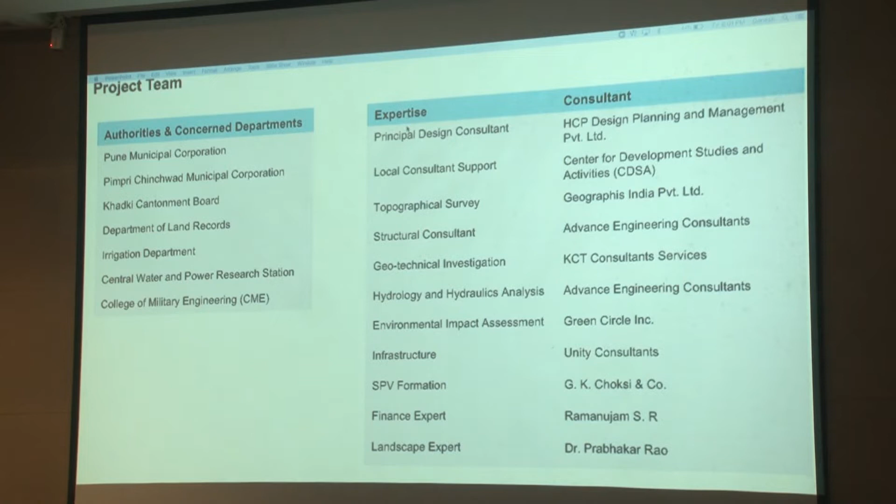So on the left side you see the list of authorities like PMC, PCMC, defense areas, and other authorities from whom we got the approvals. And on the right side you see various experts and their names. So they and their teams were also part of this entire project.

Though I am presenting it today, I am just one person, but it's the work of collective contribution. So I'll be presenting the project context in this format. I'll run through quickly because everybody is from Pune and knows about the rivers - technical studies, issues, objectives, the master plan, and everything.

But before we actually jump into the project, we need to understand the background - how the city and the river were, and why the river has turned into its current state. Our history of Pune city starts from the references we have, from the 7th century, though it must definitely be older. The point here is that when the city or settlement started growing, only then did the river start getting impacted from the urban context.

So this is the whole background till Shivaji Maharaj, till the Peshwa period. When the Shanivarwada was constructed in the 17th century, you see this very tiny area of the old town, the old settlement. We can definitely relate with this - this entire river must have been in a natural form, except for this tiny part.

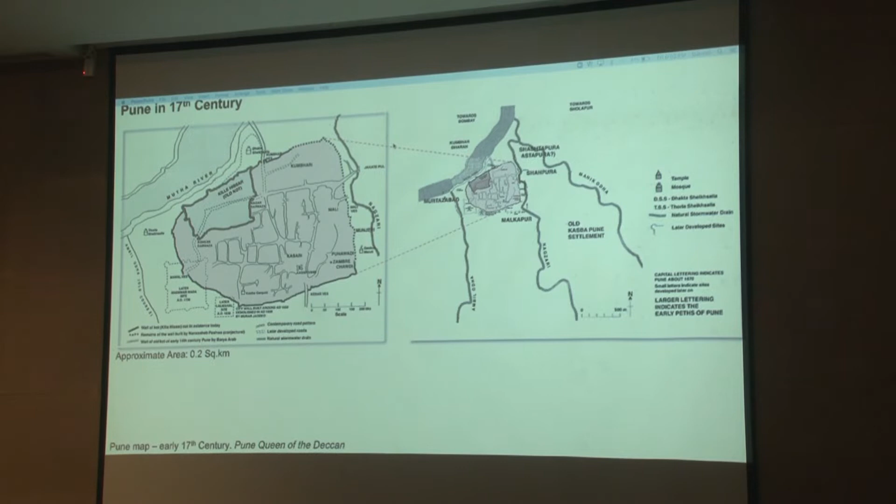But slowly, changes happened. Till the 18th or 19th century, our ancestors used to travel across the river, crossing it by swimming or by taking the help of animals. So there were no bridges, nothing like that.

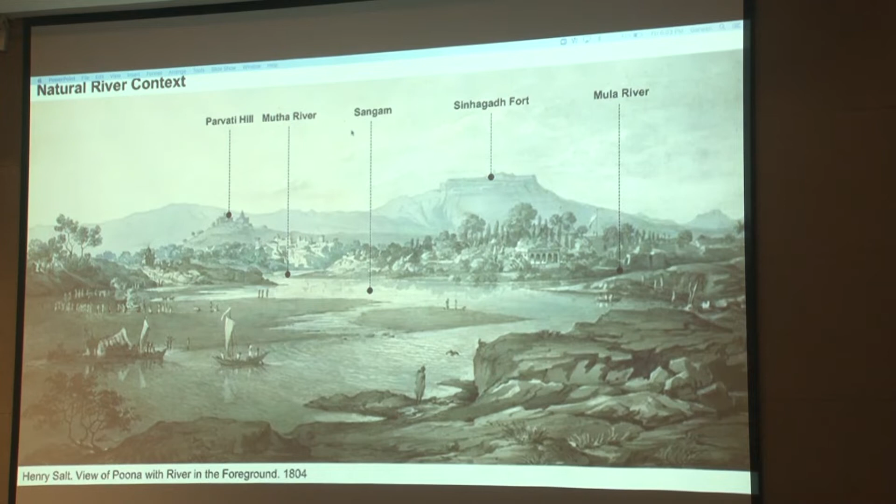This is one of the paintings from the 19th century. Here you can see Parvati in the background, Sinhagadh Fort, and very small development here. This is the Mutha River coming from the old area, this is the Mula River, this is the confluence, and then the combined Mula-Mutha River going on. This was our river at that time - very natural and not so polluted.

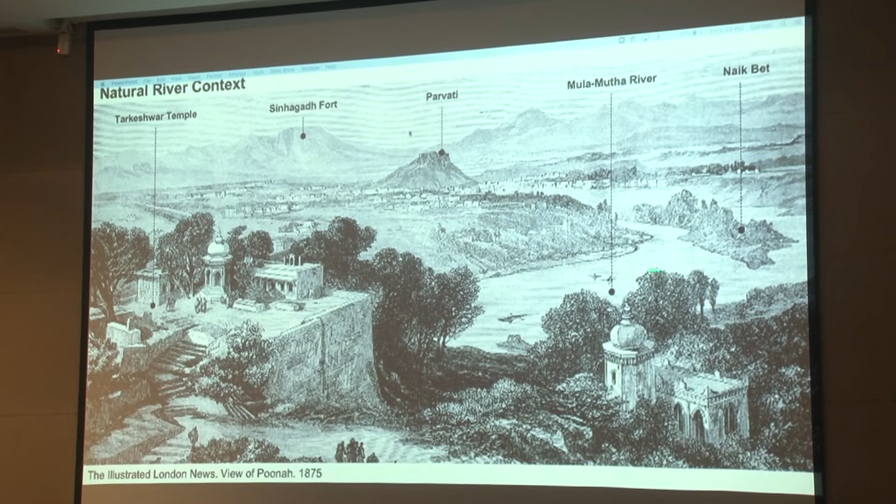Later, by the end of the 19th century, this is again a painting from this Tekri. You see Naik Bet partly here, Parvati and Sinhagadh Fort also there. So again, very natural edges, no construction, nothing - no manholes, nothing was required at that point.

Gradually, in the beginning of the 19th century, bridges started coming up. When any bridge comes on a river, it allows crossing, which means the city can grow on the other side of the river also. So till now we had pressure from one side, but now pressure started building up on the opposite bank as well, with couple of more bridges on all three rivers.

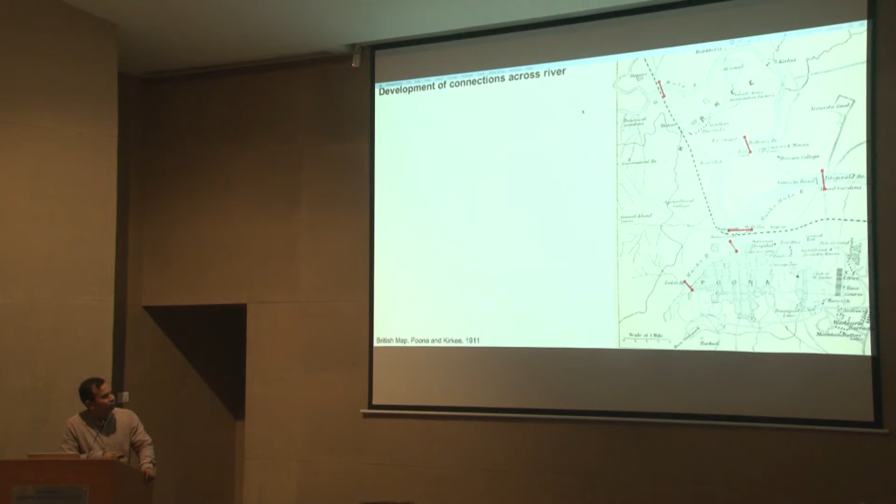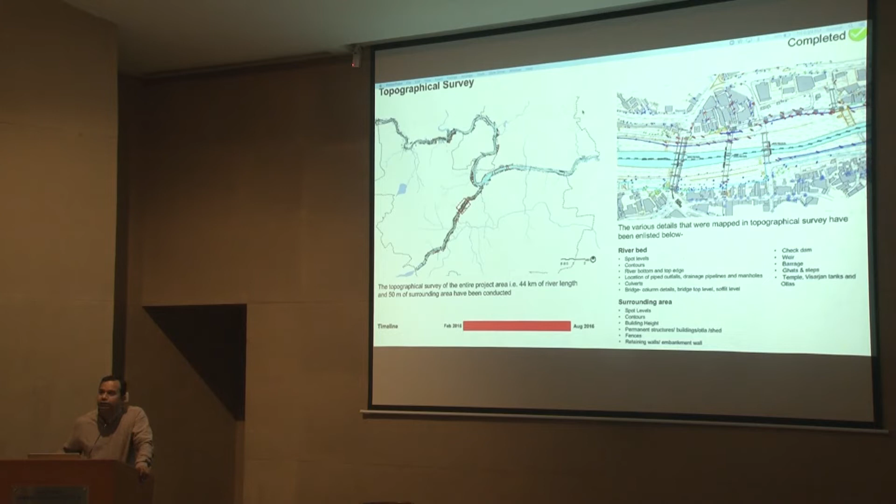We did the topographical survey of the river and the adjoining 50 to 100 meters of the area. A number of teams went on site. We also did the geotechnical investigation. Generally I explain this, but since we're short of time, I'm not entering into that.

We did the hydrology and hydraulic study for the river, and prepared a report on it, covering how much water is currently flowing, how it is flowing, and how this RFD work would impact it. That study and report is shown here.

We went to the irrigation department and asked for their approval. They asked us to get it vetted and cleared from the CWPRS. We did the discussion and got the clearance for the hydrology and hydraulics report from the CWPRS as well, and then went back to the irrigation department and got their approval. This is all a process we have been doing since 2016; we are still working on it.

Another important activity we did was understanding people's opinions—what they think about the river, the current issues, how they see and use the river, and their aspirations about this project, including which issues should be addressed first.

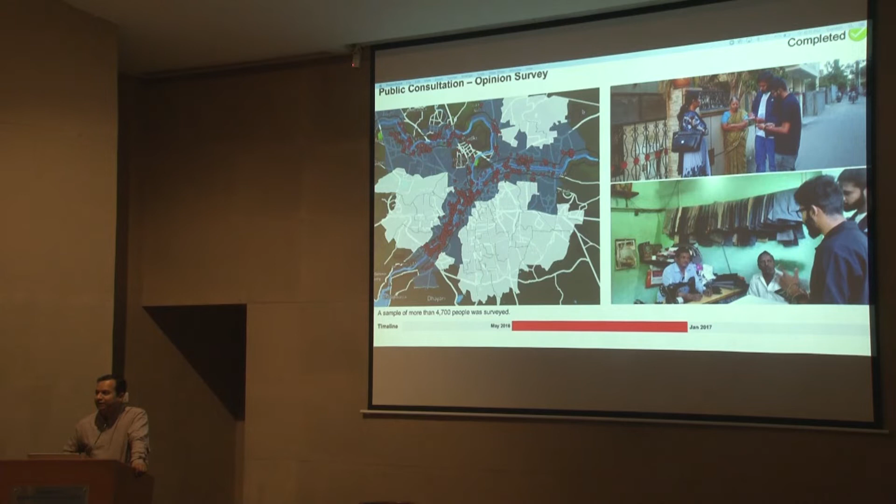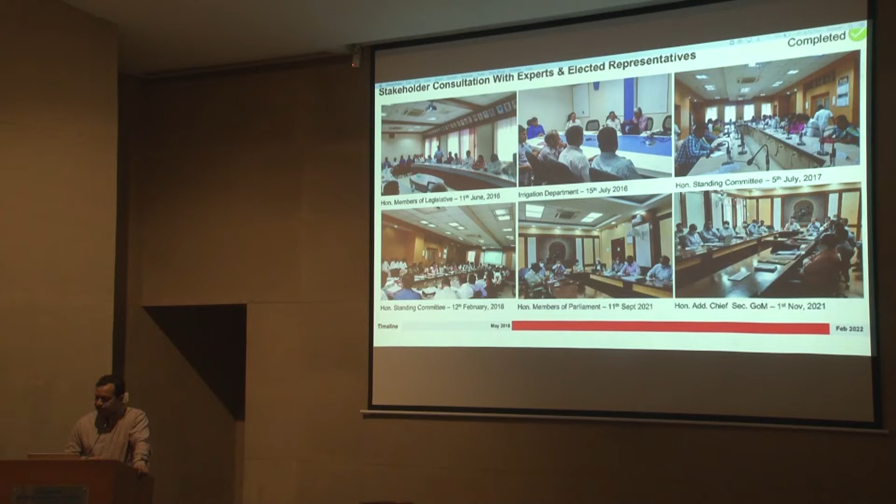We also did a number of stakeholder consultations since inception, like understanding the project, during the concept master plan, during the draft master plan, then DPR, and so on. So telescopically, the project needs to get evolved, improved step by step. So having discussions with the experts of the subject, with people's representatives, with media, with NGOs, everyone. So these are very few photographs.

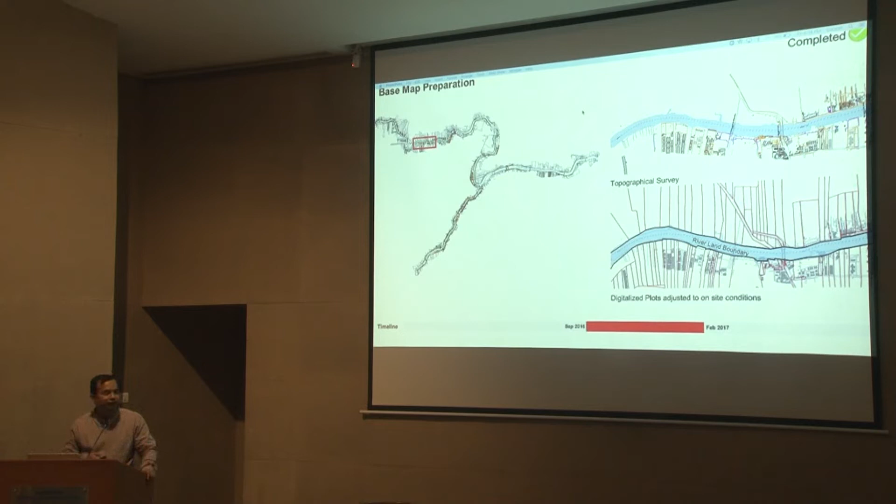So the river might be inside this or might be outside this. The river might be narrower, the river might be wider than that. Depends. But it is important to understand that in legal terms. So that was another study. The next study was the environmental impact assessment for air, soil, water quality, everything. We did the environmental impact assessment. Subsequently, we prepared the report, and we also got the clearance from the environment department.

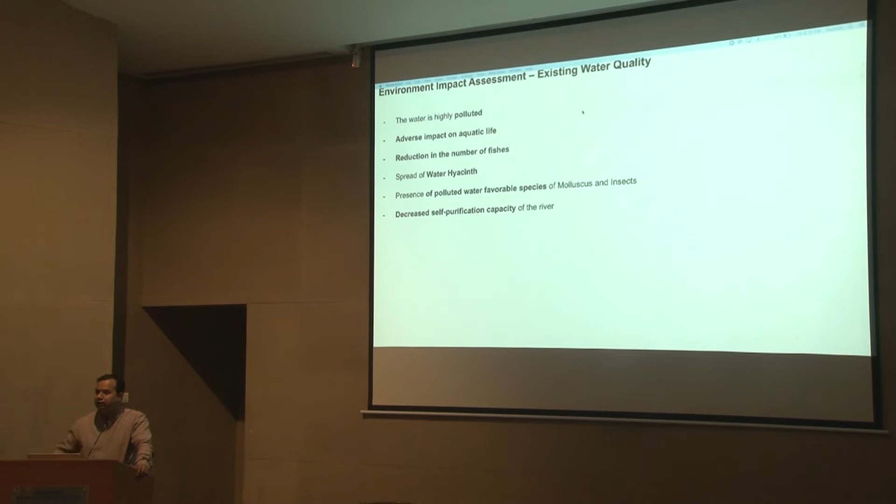So when we analyzed the water quality and the broad issues of our river water, we have very highly polluted water in the river, adversely impacting the aquatic life. It has reduced the number of fishes. The 70 species of fishes are reduced to 1 or 2. There is a lot of growth of hyacinth and so many things. So definitely we need to understand the number game also, apart from these qualitative aspects. These are some of the site photos.

Apart from these technical understandings, when any resident of the city goes on site, we see these kinds of issues: pollution in the form of sewage flowing, garbage dumping, or construction debris dumping along the river. We also have the issue of flood threat, some of the low-level bridges getting submerged, and some low-level developed, habitable areas are also impacted by the flood.

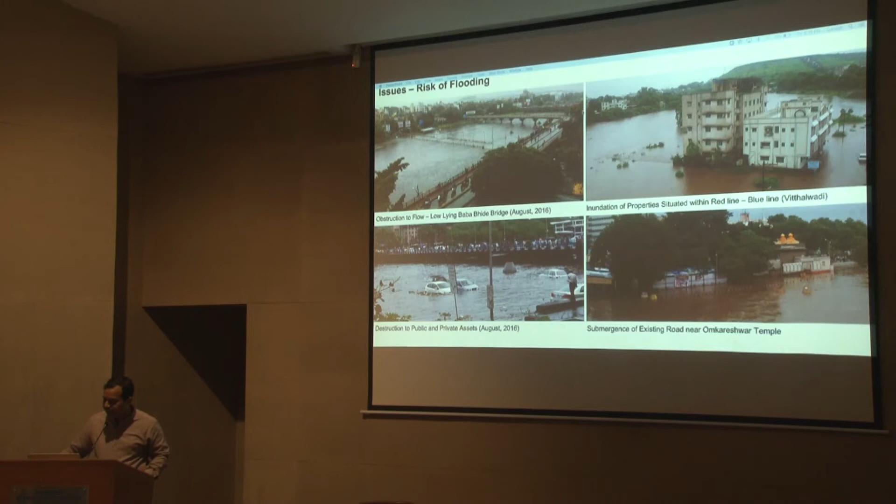Inaccessible banks: people cannot walk along the river, though it is a public asset. Most of the riverbed is dry, we don't have water there. As soon as you see it's a dry riverbed, it must be adversely impacting the ecology, right? And also aesthetically it's not good, and it's also creating a heat island effect because of the rocky bed. All these issues, you can think about the current situation. The authority has developed many activities, some places ghats, some places drainage lines, but it's not comprehensive.

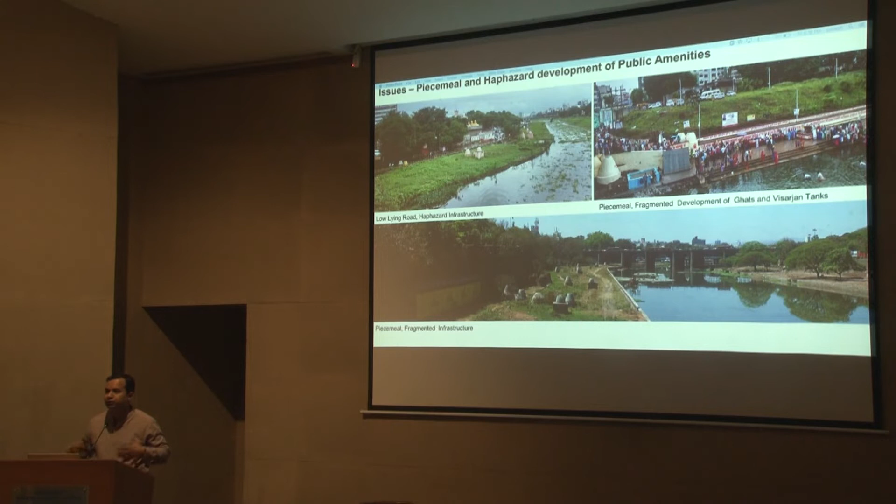It's in a piecemeal manner, so it's not creating very meaningful space along the river. All that is resulting in the city turning its back to the river. We don't want to see the river. If you have a plot along the river, then also you build some sort of compound wall or something so that you don't see the river. You should be protected from the flood. Everything, technical, aesthetical, all the issues are there.

So instead of bringing some alien kind of objectives which are very new to the world, I think having the same issues resolved under the project makes more sense. So these are the issues. Our rivers are polluted, so we need to clean the river and make it pollution free. There is a flood risk, so we need to reduce the flood risk. So we'll go one by one through how these objectives are strategized in the project. Let's see the first one.

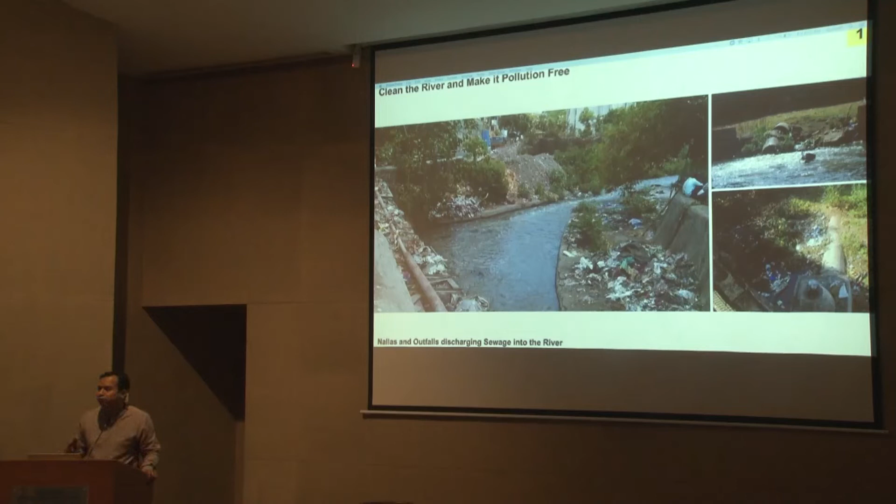We need to understand from where this pollution is coming into the river. So these are the two sources. One is the open nala or the piped outfall. They are bringing pollution into the river, simply. So we mapped all those piped outfalls and open nalas along the river for all three rivers. In order to prevent that entry of pollution into the river, there are some existing interceptor lines, trunk lines. There we can integrate, curb these outfalls and take the sewage into the STPs.

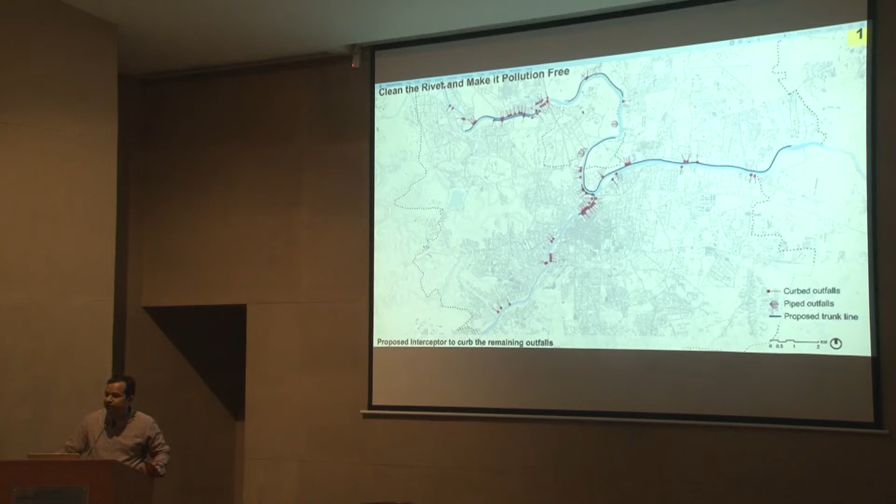Along with that, the JICA proposal is also underway. PMC is working on this. A lot of tendering work is also done. So we also checked that alignment along the river. That will also help us to curb these polluting piped outfalls and nalas. And if any outfall or nala is still missing, then under this project we try to propose some more interceptor lines. So the point is, from nowhere should pollution enter the river. Whatever sewage pollution is entering the river should first be taken to the STPs, treated, and then poured back into the river. Simple.

Additionally, because some of the upstream areas on the Mutha River are getting developed, rather already developed, we need to have some sort of treatment facility, the same interceptor line and treatment, and then treated water should be poured from the upstream area. Otherwise, we'll clean our area and from upstream the pollution might come. So that also we thought out.

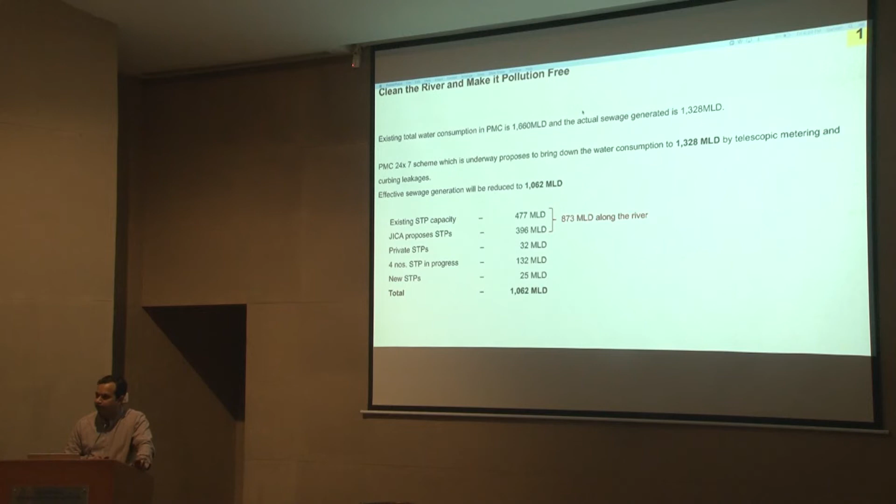Apart from that, there are some private STPs. Some STPs are under progress, and 25 is a shortfall which they will cover with some new STP. So broadly, they are talking about completing all the sewage treatment capacity of the city along the river in the current PMC area, so that from no point should pollution enter the river, and it should be treated and only then released into the river.

We also have these kind of huge manholes. Everybody has seen that, and they look wonderful, right? So we need to sort of do something about it. So what is happening? It's not only about the aesthetical issue. It's also about the damage during the flood. It resists the flood flow, afflux gets into it, height is increasing, the speed, velocity is reducing, plus it gets damaged. So multiple issues are there.

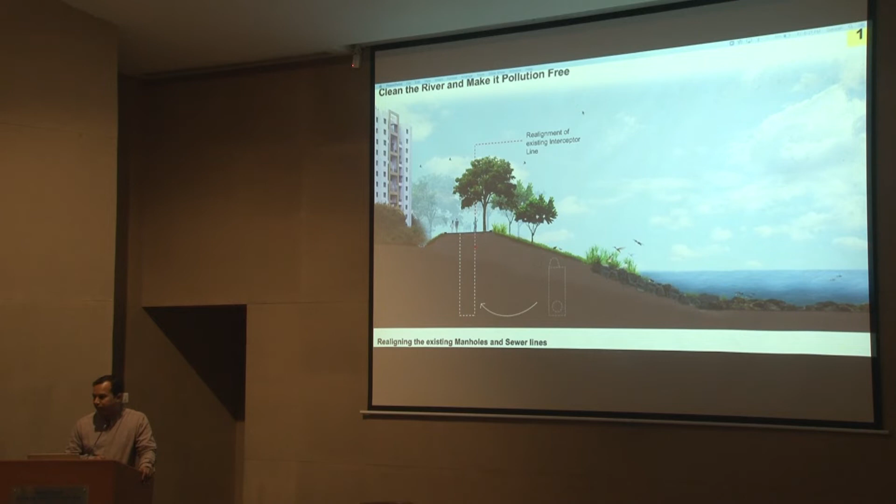So we need to improve this situation. So what we are trying to do, with this kind of large manholes and the drainage line under that, when we do this kind of green embankment, we need to shift it, take it away from the riverbed to the periphery and integrate with the embankment so that there will be no damage, there will be no adverse impact to the flood, and we can maintain it in a better way. So that was all about the sewage generation and sewage treatment before we release into the river.

But apart from that, there are other sources like garbage dumping and debris dumping along the river. So why that is happening, that we need to understand first. Because there is no check on the river. It's 88 kilometers of long river length. Who will keep a check of the river? How many watchmen or security guards PMC need to put? It's very difficult. That means we need to have a public check on it.

Let's have one example. This is Tadiwala slum area along the Mula-Mutha River, and you see the situation. It's unchecked area. What if we convert this area into a very walkable trail over here and a green embankment along that, which is protecting from the flood also, and this edge will allow people to walk or do the cycling. If people check is there, then nobody will dare to put a garbage bottle, a single bottle into the river, and definitely a truck of debris dumping will not be able to get an access. So that's the only way out, right?

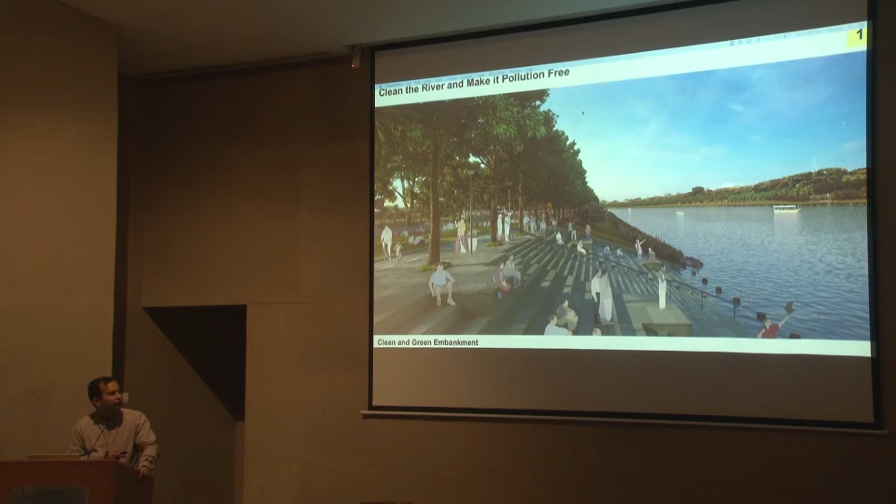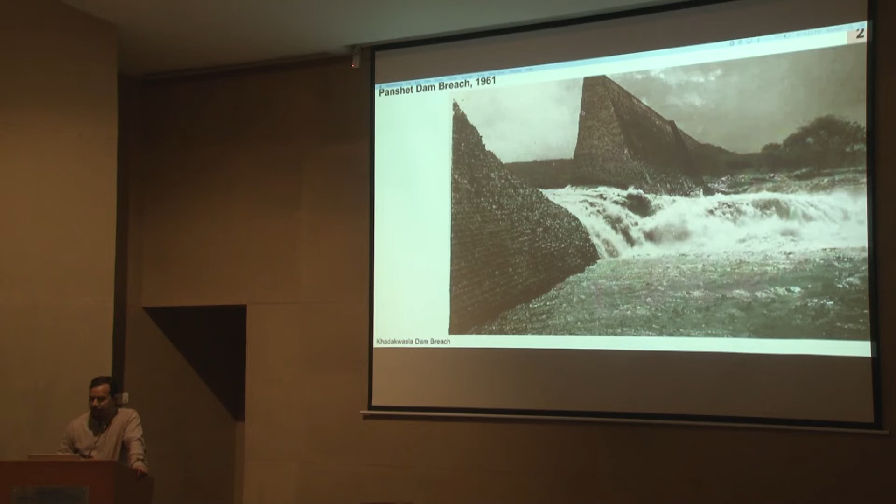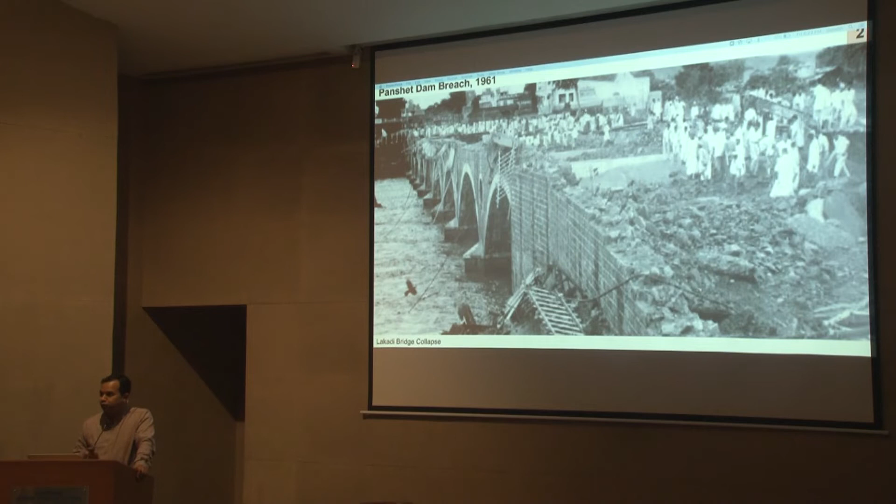Let's go back to the history again. This is Khadakwasla Dam, and this is Panshet Dam. This Panshet Dam was damaged in 1961, everybody knows. And what was the impact? This is from the Pune Queen of Deccan, and a lot of area surrounding the river got inundated. The flood affected this area. This is a Lakadi Pul photograph. Lakadi Pul, which we see is a new bridge. Earlier this kind of bridge was there, so that also got damaged. This is the area which got submerged because of this dam break.

Later on in 1962 to 66, this Khadakwasla Dam was reconstructed with the new technology. In 1972, the Panshet Dam was again reconstructed. Why am I telling this story? Because now the technology has changed, how the dams are constructed. Now we don't have a risk of dam break, but still we have a risk of flooding. So the risk of dam break is technically something very low, but risk of flooding is high, which we will go into in detail. So now we need to think about the risk of flooding only in an urban context, no need to think about the dam.

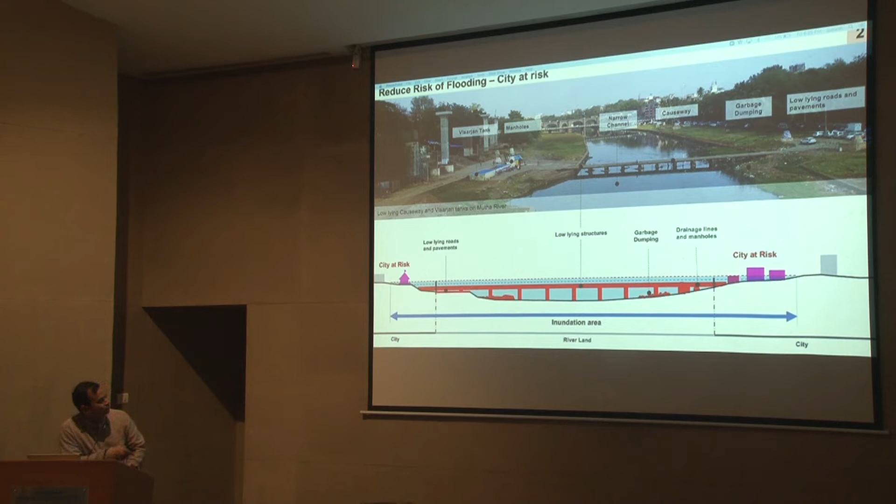So if you see this kind of situation, you can point out the number of obstructions that are there, and that is actually becoming a hurdle to the flow of the water. As soon as we identify and remove these obstructions, there will be some improvement in the carrying capacity of the river. So flood improvement means improving the carrying capacity of the river.

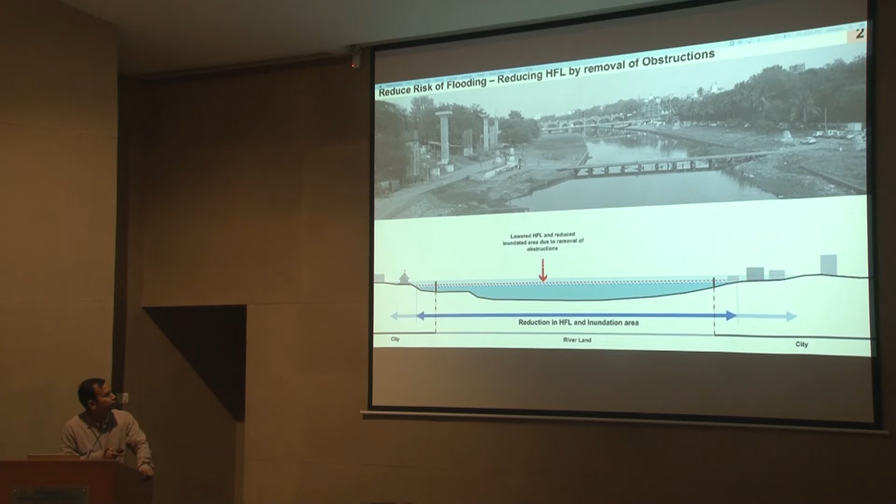Having this middle area very much clean and free from obstruction is the most important objective. But by doing that, we may not be able to reduce the inundation so significantly. Some of these areas may get inundated, some have developed, some may get developed in future also. So to prevent the entry of water into these low-lying areas, we need to have some kind of edge protection work so that the water only flows through the river and does not enter into the city.

But instead of having just a vertical wall, if we have this kind of green edge work, we can also accommodate infrastructure like that interceptor line, etc. We can also have walkways from the pedestrian movement point of view, and greenery along the river.

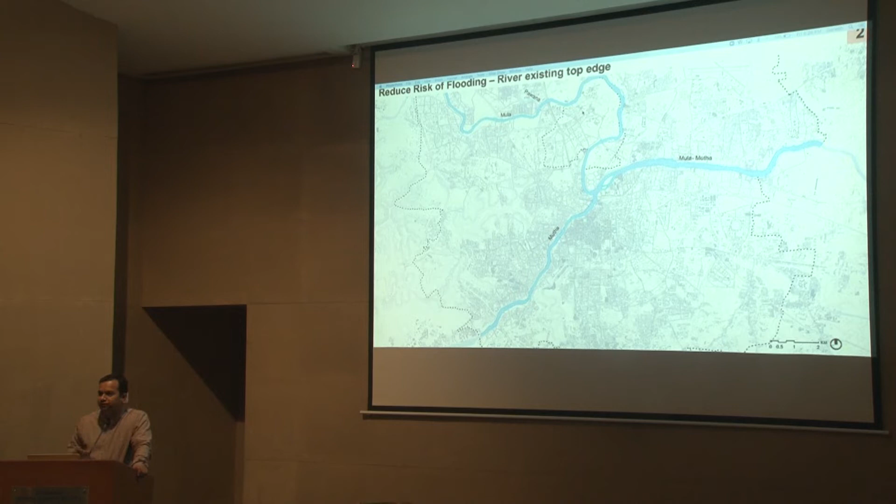This is a current river in natural condition, not from the land record point of view, but from on-site. This is where we see the water. If you zoom in a little bit and try to understand, there are some areas which are very narrow in current condition and some areas very wide. Let's zoom into one of these. This is how it looks on Google. On site, this is how our river is.

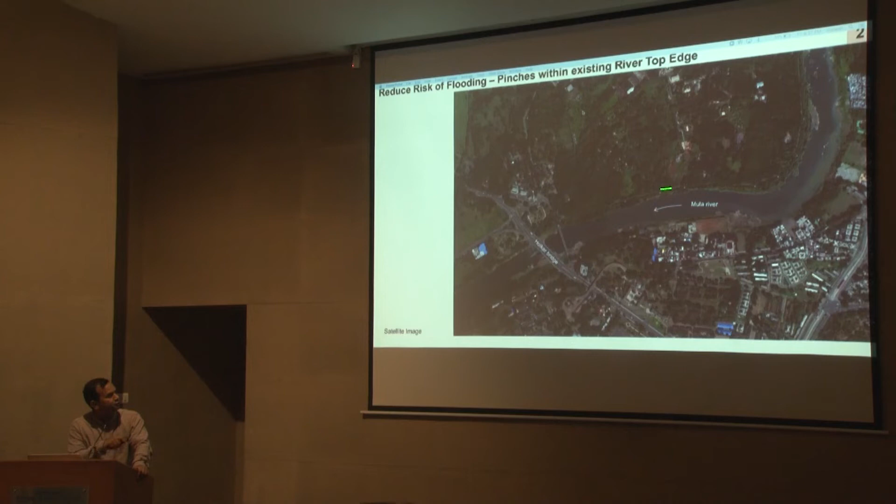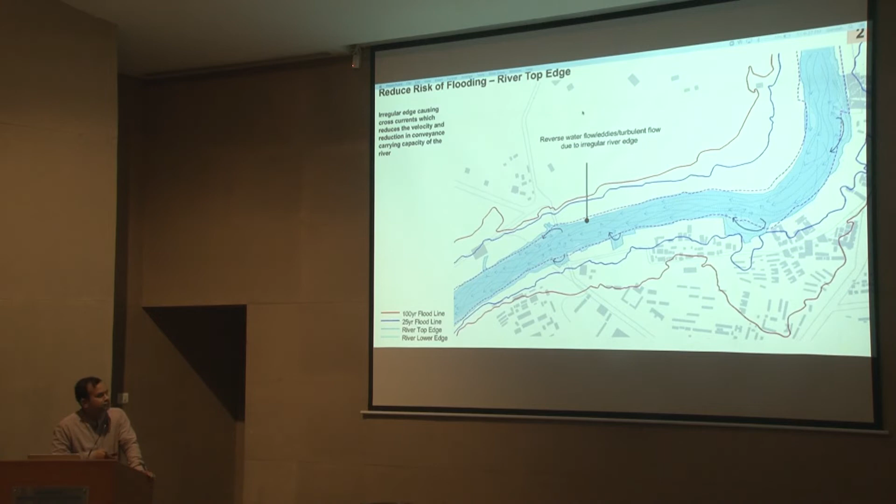When the water flows in a lean period, it flows like that because the terrain is always up and down and back and forth, so there is some movement into it. But as soon as the water level keeps rising during the monsoon season, these kinds of eddies or bhavre, as we call them, start happening, and that actually goes on increasing as the water spreads into the surrounding areas. So these surrounding areas are not adding to the carrying capacity of the river, but rather they reduce the flow, the velocity of the river.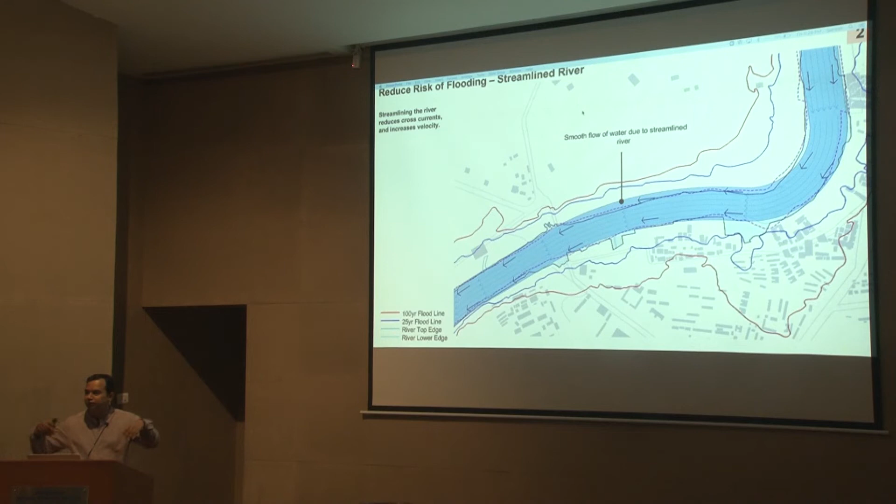So the idea is to not allow water to enter into these very shallow and surrounding developed areas, but to use the water in this middle, actual river part of it. Hypothetically, we want to keep the river water into this lower bed only, but we need to have some kind of edge protection work, otherwise the water will not listen to us and it will flow into the lower lying areas. That's why, in order to keep that water into this river only, we need to have some kind of green edge protection work.

By doing that, what we achieve is the eddies are gone and the velocity of the river increases. As soon as the velocity increases, the carrying capacity of the river also increases, and that gives us a better scenario for the flood level also.

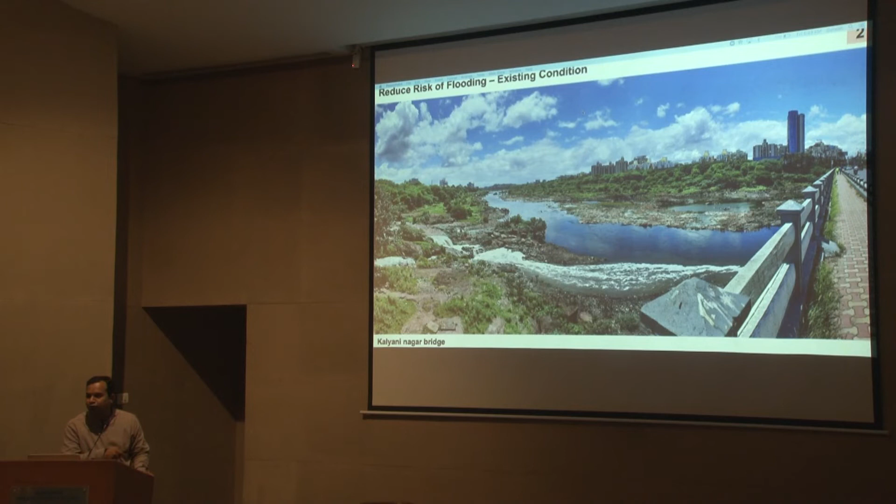This is one of the photographs from the Kalyani Nagar bridge. You see here, Kalyani Nagar bridge. This is the current scenario, lean period, there is not much water available. During monsoon, if a 100-year flood comes, this is the scenario - it may enter into these kinds of vacant areas. Since there is no development there, it may not damage much in terms of life and wealth.

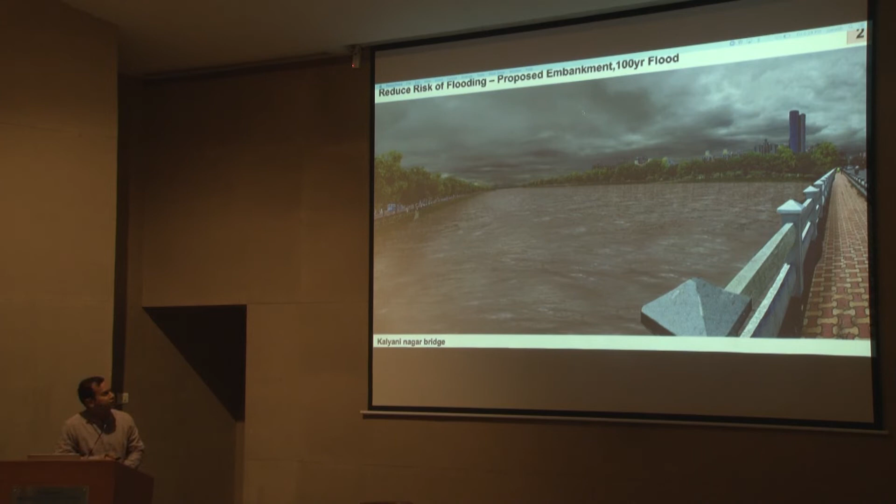But if we have these kinds of edge protection works, green edges, the water will remain in the river bed only and will pass very efficiently. Once the water recedes on a normal day, we'll be able to see again these kinds of green embankments, and that's how we can protect the surrounding area from the flood threat.

Let's see the same scenario for a developed area. Here you have this Tadiwala slum, which is a very low-lying area. Under a 100-year flood, it will definitely get submerged and the water will enter into the houses of the people.

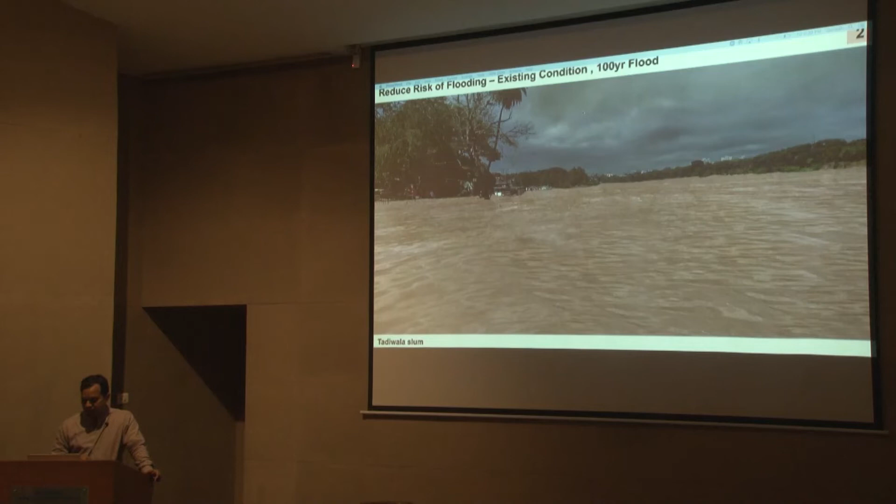But what if we create this kind of edge protection work and allow water to flow through the river only? So these low-lying areas will be protected, and once the water is gone, it will be ready to use again. That's how we need to design the landscape wherever hardscape areas are needed, such that there should be no damage due to flood, but it should also come back immediately just by cleaning or something.

It should be ready in a day or so for people to use. But here we are talking about a river which is 44 kilometers, so we cannot have one solution everywhere. We need to become a little design oriented and try to find references from the site only.

In the first scenario, we termed it as separately sparsely developed, moderately developed, or intensely developed areas where development has reached up to the river. There is less land available there. Here you can see a lot of land available, and the quantity of land availability is reducing. This is Mutha River where the very narrow channel is there, 30-35 meters, and the building is very near to the river.

So if we have more land, we can go a little more gentle with the help of natural material like compacted soil, stones, grasses, trees, shrubs, etc. If the land is not that much available, then we can go a little more trapezoidal, but the kind of technology and material is the same here. That's why we are calling this a green embankment.

And these green type embankments are significant in number. They are 87% of this 88 kilometer stretch. But in some areas like this, where buildings are there, you cannot go ahead and demolish this building and then build a green embankment.

So you need to be a little reasonable. The project should be feasible to implement. And that's why, forcefully, in some areas we need to go a little vertical. But there also we need to house this interceptor line inside, with shade giving trees on lower and upper levels. So as much as possible we can do that. Wherever acquisition of land is not possible, there only we are going for that, which is only 13%.

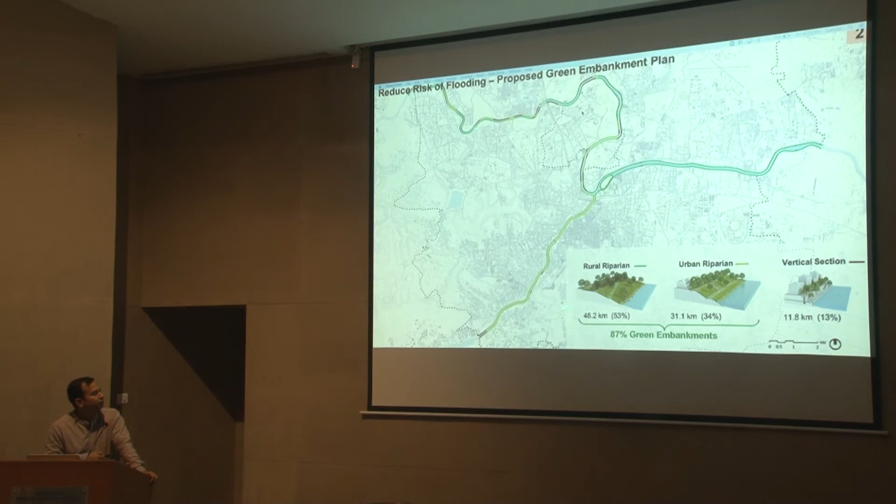This map itself shows you there are few areas where the red dots are there. That is 13%, and mostly the edges will be green. It's like defense areas etc. where we need to go vertical. We cannot ask for more land in the developed areas. So most of the river embankment will be green in nature.

So we are protecting the city from the flood, as well as protecting the river from erosion, and we are trying to create green edges. The next objective is to provide accessibility. This is the current situation - the river is like this. We cannot access it, we cannot see it there. But everywhere we cannot just go and do a one single stroke and make everything accessible.

So we tried to categorize it into 3 or 4 categories. One is very active areas where the current ghats and activities are there. So we mapped all those activity places and termed it active areas. There will be some areas which are calmer areas, like here you can only walk, do cycling, sit and enjoy the shade of trees and green edges.

But some areas are very, very important, very natural in condition. They will have very thick green vegetation along that. So those areas need to be very much protected. As much as possible, we should reduce access also, only service access or something like that. So there are some areas like Naik Bet here, Salim Ali Bird Sanctuary here.

Even along defense areas, some places might have more density of trees. Here the biodiversity, the botanical garden is there. And here the Ram Nadi confluence is there - there also you can see a lot of green vegetation. So wherever possible, we can make that kind of customization so that it looks like a very natural river. After a few years, it should look like this is how the river must have been since the beginning, as if nothing has happened in between in the last 2 centuries, I think.

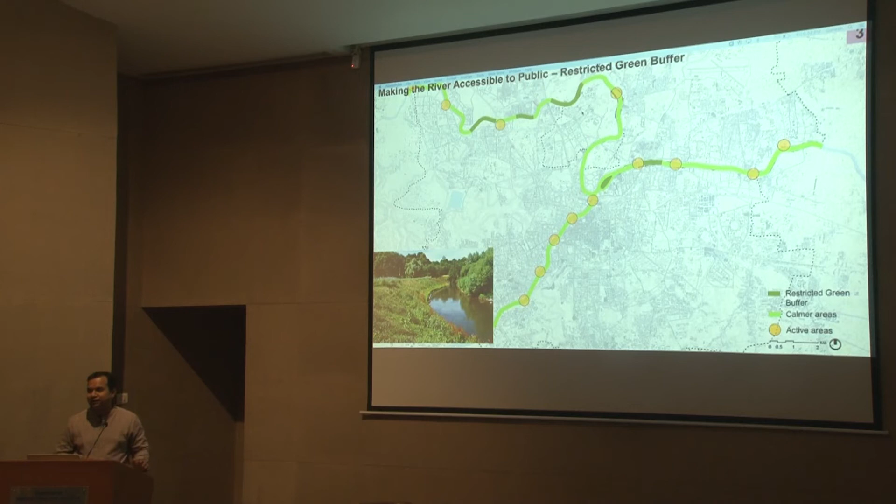So that should be the idea. Again, trying to understand how these 3 categories may look like. Same example, I'll go through.

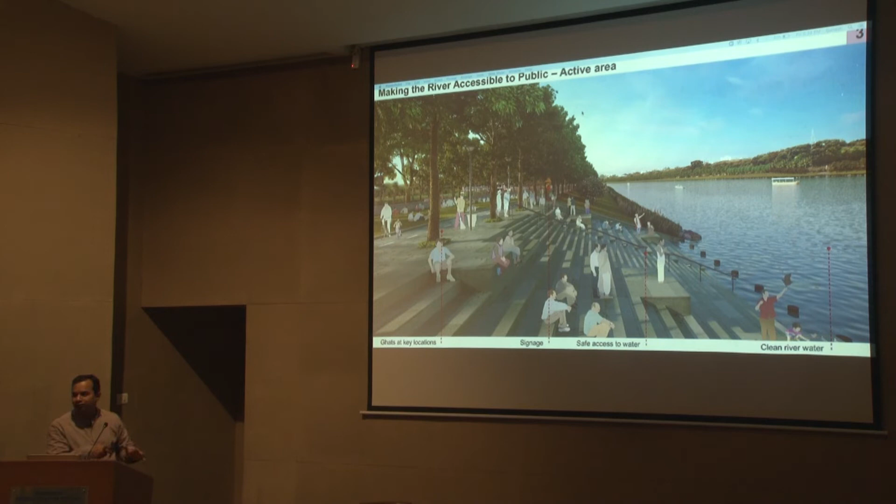Here you saw if the active areas are very close to the developed areas, we can have some ghat areas and a little more hardscape at the upper level, but the edge is again green and only a few ghats can be placed. Some areas are already calm, so let's maintain that calmness and just do the edge protection work. Even walking and cycling can be done with the help of stones, murum and mitti kind of material, so percolation happens, which is also locally available. And 2 to 3 rows of trees we are planning to add.

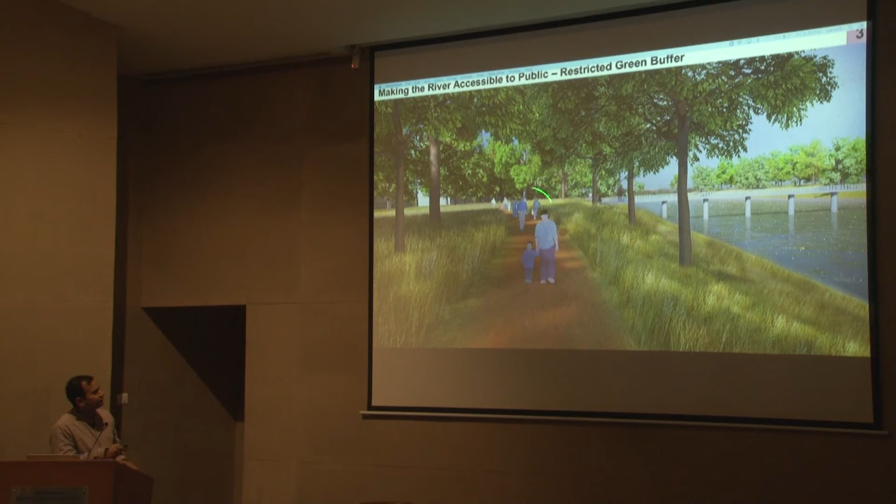The third category is a very minimalistic approach, but we still need to protect the surrounding areas from flood. We need to create some kind of access, very pedestrian and with natural material. So all these 3 types of embankments will provide upper and lower level connectivity, access, trees and greenery. As much as possible, we are trying to provide a linear garden to the city, spreading almost 88 kilometers everywhere.

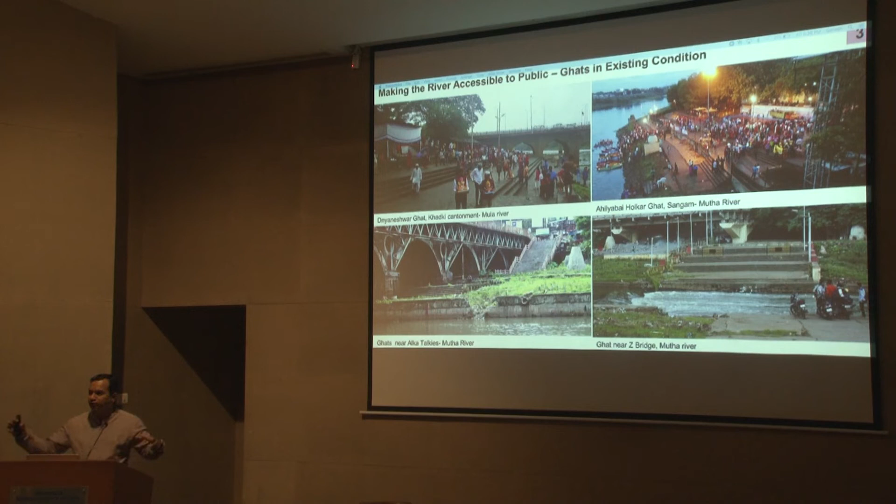In terms of accessibility, in the current situation we have these key elements. The first element is the ghat. There are a number of them, like Ahilyabai Ghat and Sant Dnyaneshwar Ghat. These are nice large ghats which need to be integrated, retained and enhanced with the help of facilities and protection work. So we mapped all these ghats.

Some are in very bad condition, broken, with no facility and no access. So we mapped those and tried to understand the current development and connectivity. We can add more ghats next to it, and based on the design of the embankment, we can improve the ghat condition or have a new design. These are very conceptual images.

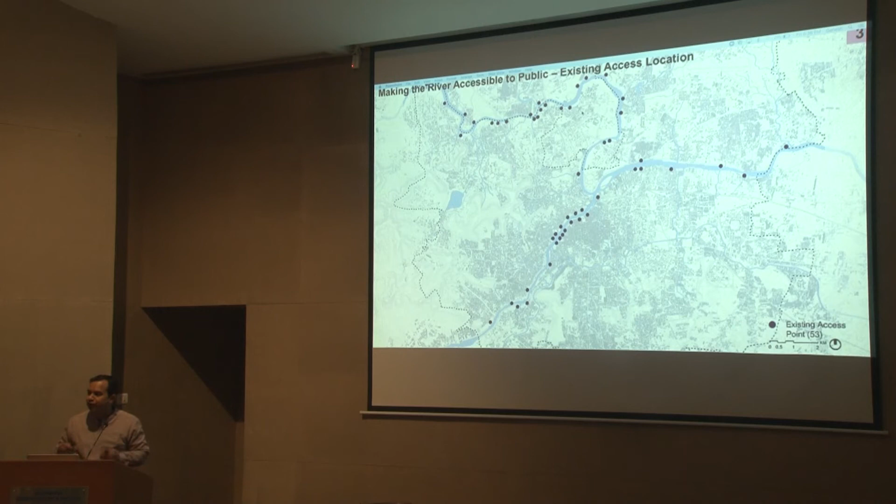Apart from that, we also have some access points, just staircases or ramps where one can reach up to the river or the local lower level, and some more can be added. There might be ramps so cycling can be permitted at a lower level, or staircases so people can walk down to the lower level.

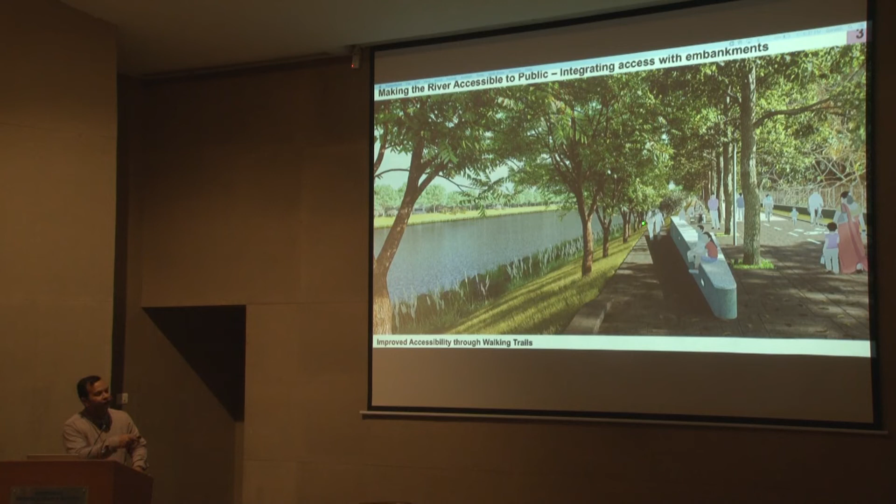This is a kind of visualization from the upper promenade, which is around 6 to 8 meters, and from there a narrow trail goes down. For example, if it comes here, this is the current scenario — you see all this invasive trees and invasive shrubs, because the water is also polluted. This can be transformed into this, so you reach up to the river water safely, with clean water, as discussed earlier, and the green edge.

Next, going into the water: ensuring flowing water nature and availability of water. This is one of the most important objectives, I would say, in an entire river, because the river is a natural entity with its own qualities. It had a lot of ecology, flora and fauna, but because of urbanization we have lost a lot of aquatic life, flora and fauna.

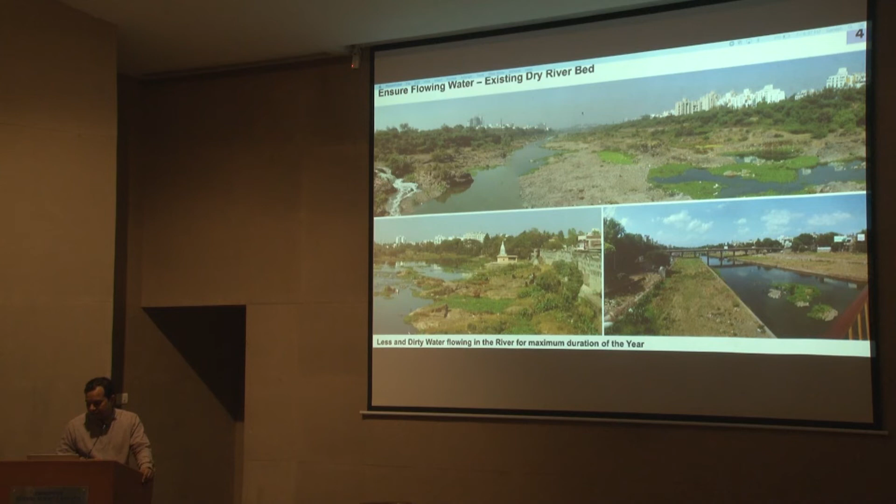So this is the current situation. Most of the riverbed is dry. We don't have water, and whatever water we see is just a trickling of sewage water flowing into the river. Why this is happening, we need to understand first.

As soon as you have a check dam and weir, that results in a lot of obstruction to the flow of water, because it is more solid in nature. A barrage opens up the gate, like a 10-15 meter gate, allowing full opening for the river to flow. Plus these check dams and weirs are very shallow structures, so the retention is limited to a certain length only, and that's why these patches don't have water. Whatever water we see is only sewage water flowing. So we need to change this situation.

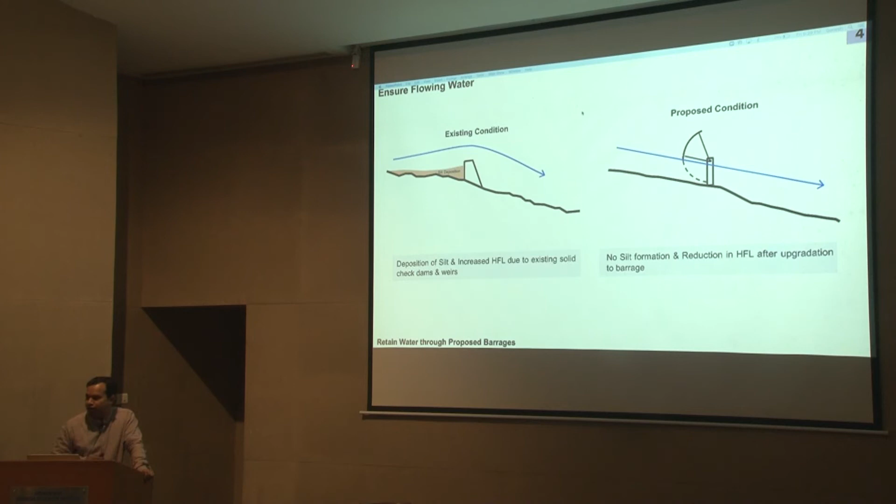But if we replace that with advanced barrages, the barrage opens from the bottom, and as soon as it opens from the bottom, there is no silt deposition. So water takes away all the silt, and also no afflux during the flood.

Then again immediately the question comes about the stagnation - we'll go into it, hold on. But let's understand how much water we are retaining.

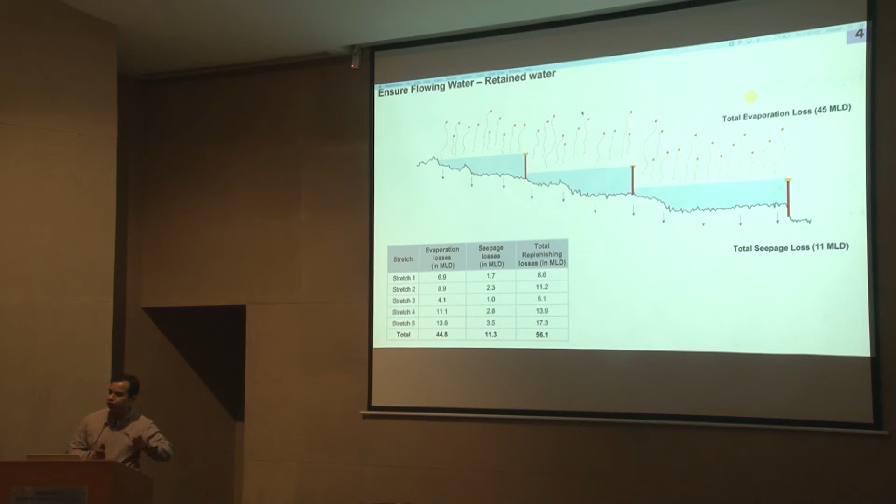It will have some losses, and those losses are of 2 types - one is seepage and one is evaporation. Because our riverbed is rocky, there will be limited seepage but more evaporation loss. In totality, it is around 56 MLD water loss per day. That was 57,000, this is 56 loss.

In order to refill the water, because otherwise every day, centimeter by centimeter, the level may go down, we need to replenish the river with water. Where will the water come from? I am again reminding the same number, 873, which is the treated water from the STPs, can be poured into the river so that the water levels can be maintained.

But how much do we need? We need 56. How much do we have? We have 873. So that means only 6% of the water we need to retain the water levels, but we have 94% more. Definitely it will result into the flowing nature of the river - that means we will have a clean flowing river condition.

Apart from that, if the STPs at that time - maybe after 3 years or 5 years - are not of that quality, then tertiary treatment will also be required, and PMC is aware that if required, we need to implement the tertiary requirements so that standards will be achieved.

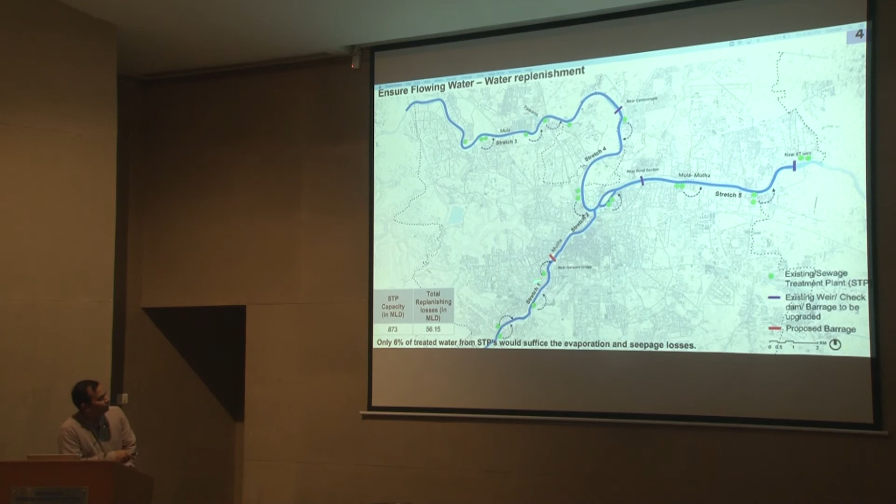So this is a diagram. All these STPs which are along the river - see, all these strategies are developed. I'm just creating a story out of it, but everything is informed by different departments, divisions, and experts. From there these STPs will help us pour water into the river, and these rivers will always have clean flowing water. This is about the tertiary treatment.

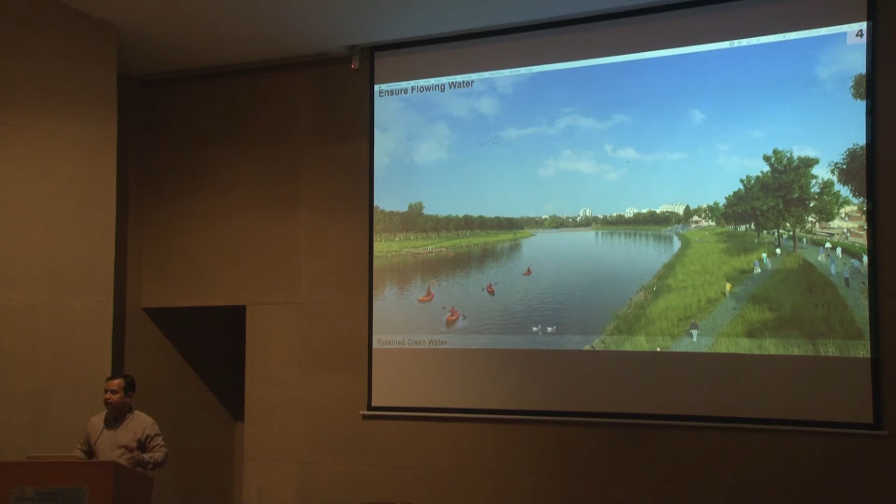So the current situation is like this - very less amount of water - and we can replace that. We may also be able to have some sort of recreational boating. I don't think we will be able to have navigation into the river - don't be so ambitious, because our rivers are rocky, very much meandering and narrow. So navigation throughout will be a little difficult, but yes, at parts of 1 or 2 kilometers, we can have recreational activity, recreational boating.

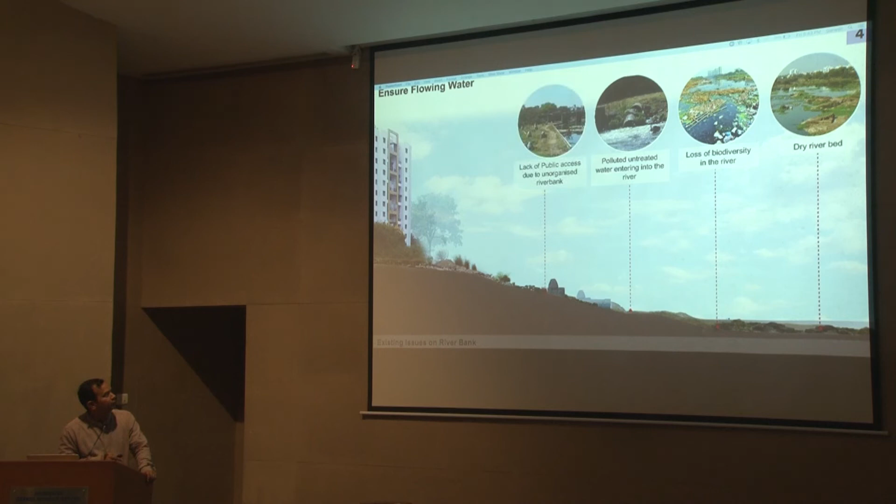Because of that, there is loss of biodiversity. Pollution is entering into the river in the current situation. Piecemeal development has happened in this area, like drainage lines and manholes etc. Because garbage dumping and debris dumping is happening, that is also impacting the seepage etc.

And because of the poor quality of water and other sources of pollution, we mostly see random and invasive trees, shrubs and grasses along the river. So this is the current situation of our river with respect to ecology.

So how can the availability of clean water transform it? Yes, because of clean water, we will be able to have aquatic life in it. We are proposing this edge protection work with the help of boulders where the water area is. These boulders will provide strength to the embankment, but will also be able to house aquatic animals, insects, frogs, and all these things.

These green edges, the grasses and shrubs, are very deep rooting grasses and shrubs. So the animals which can flourish in this area will also come up. Very native, hardy, indigenous trees, sometimes fruit-giving trees are also proposed, so that birds' roosting and nesting sites will be provided in a natural way. This compacted soil area, with very little but natural material used, is how the edge protection work is proposed.

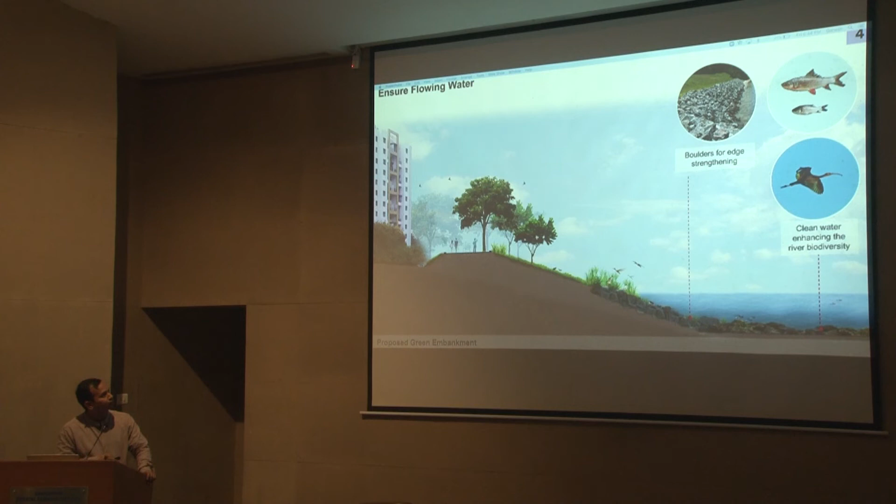So I just mentioned the deep root grasses and non-invasive but local trees, which will give strength, a kind of reinforcement within the embankment. We will try to consider and integrate all the existing trees which are there, but additionally we will add more rows of trees along the river.

And on the backside, from the city area, if we have some surface runoff, that drain also needs to be maintained and then subsequently released into the river, so that this area also does not get locked up. So that's the strategy, and this is what it looks like currently.

So you have clean water here, below that there are boulders, you have grasses here, native grasses and trees, and an upper level walkway at key locations, but with protection we can provide access.

In totality, this water availability, especially clean water, will help us improve so many things. One is recharge of groundwater. There will be some seepage of clean water into the ground. Currently we have polluted water, so seepage of polluted water is happening, which will be replaced by a significant amount of clean water. So the groundwater table will get recharged.

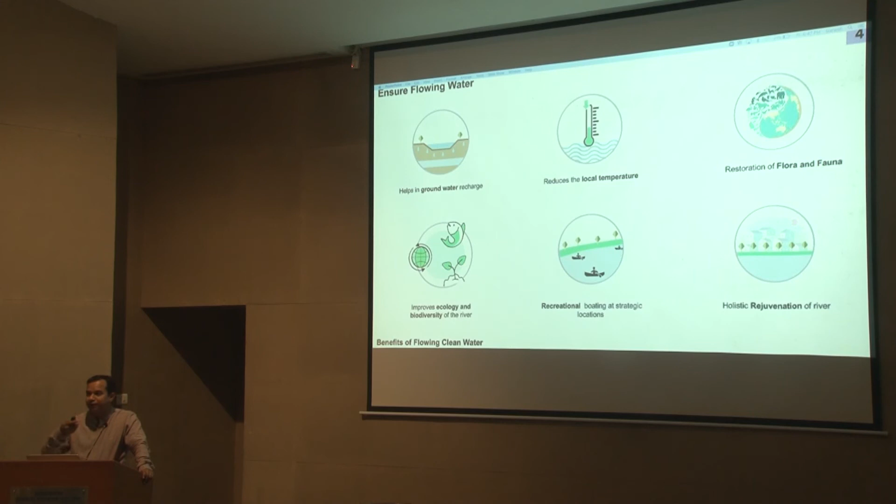Restoration of existing flora and fauna, because having a very sensitive design of the embankment near key restrictive locations, we will be able to restore the current flora and fauna. It is at very few locations, but still we should try as much as possible to restore it. The ecology and biodiversity, which is already lost, will come back.

We will have recreational boating. In totality, the river will get rejuvenated, and when we say the river will get rejuvenated, that means the river's self-cleaning capacity will improve. So this is all about the flowing nature.

Next, about connectivity. It's a large project spread over very long distances. In the current situation, there are many places you see these orange lines - these are all public existing roads. Under the development plan, more streets are planned which will get developed.

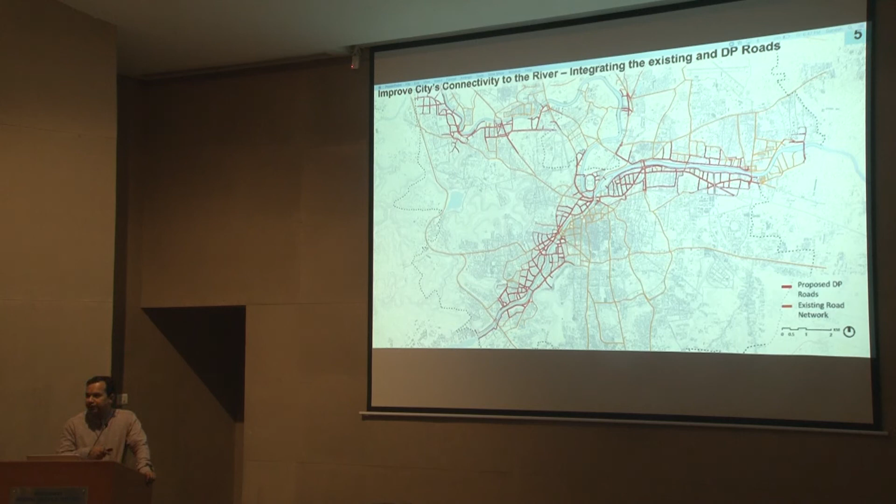Some are already there. So currently this edge protection work will come up, and eventually whenever the parallel road comes up, that will improve connectivity to the river. This road is already under the development plan - if implemented, it will improve connectivity with the river.

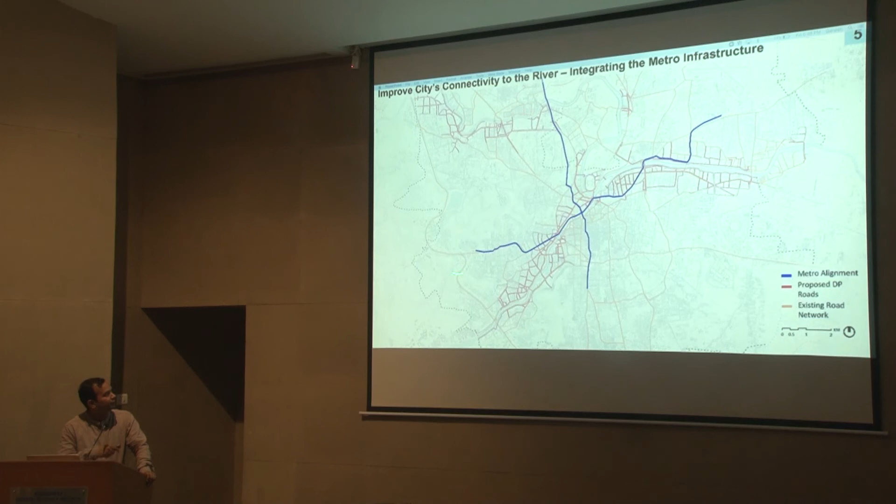Apart from that, the important point is having a metro. This part is parallel to the river, with crossings here and here, and adjacency to that. So whenever the stations are there, if the pedestrian connectivity from the station area is improved and strengthened, then people from these areas can also access the river efficiently.

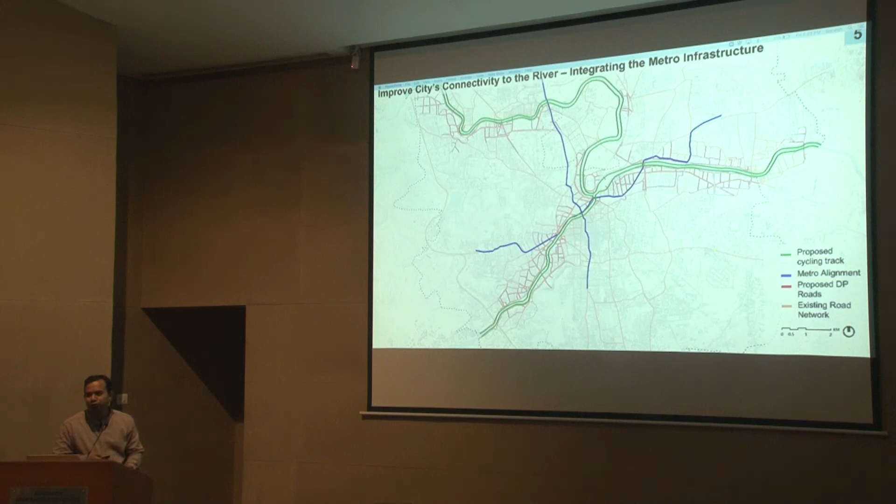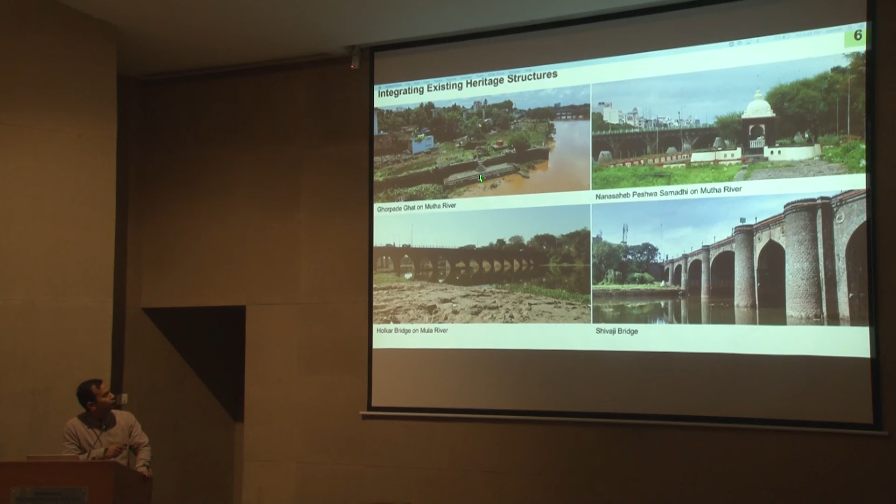Coming to the last objective of our exercise is integrate the existing heritage and religious recreational places. So we try to understand which are these places. So there are a number of ghats, samadhis, bridges, which are heritage, historical importance. Shaniwarwada, which is ASI, but which is far away from the riverfront project. But these are locally addressed, graded heritage sites. So this is one of the visualization, just to sensitize that.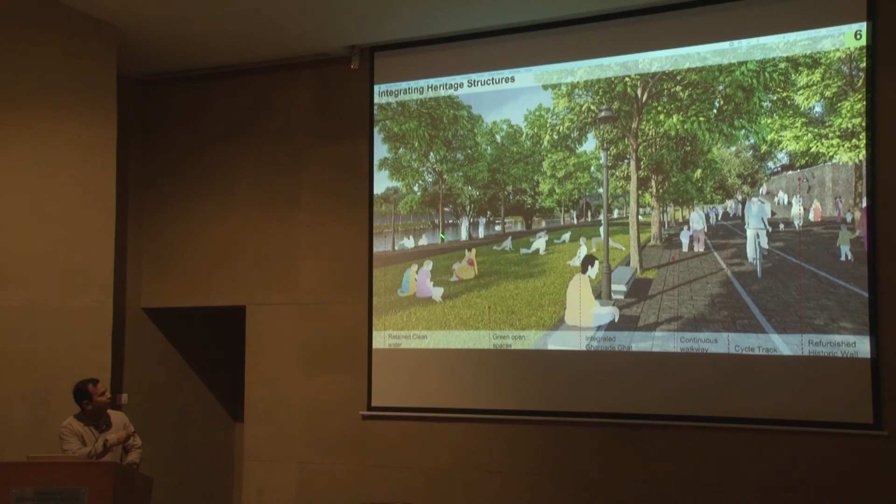So understanding that concept and going beyond the 3 type of embankments, we need to do the customization of this area, try to match the material, try to match the activities, and retain the existing heritage and the qualities what we have access. There is existing ramp, so we need to refurbish that. Ghorpade Ghat also need to be integrated, and widening of the river channel is also there. This is just to inform that whenever that kind of detailed planning happens, detailed execution, design happens, then we will be able to deliver and convey all these points in much more detailed manner.

Again, the same location, but from the bridge. So you see on one side, this is tall wall, on both the side, another one. This is narrow channel. These are existing manholes, how the site is looking. And yes, it will be widened, so there will be low level promenade. Using the existing stone wall, that way we can reduce also the cost of the project, and adding more trees at a lower level also.

So this is a submersible area. So this is a current river width with respect to the flood. It will remain like that, but in lean period also the wider and retained clean water we will get, and this may get inundated during the high flood, no matter. But after the flood, you can just clean it and use it.

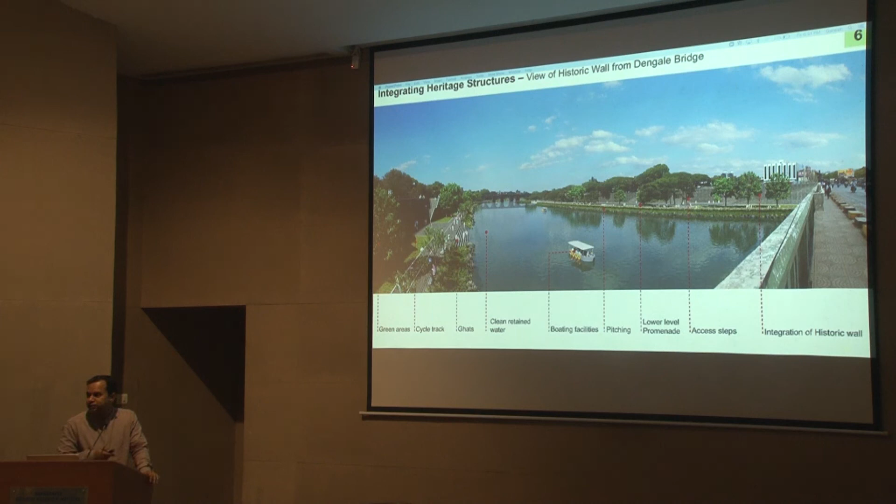Other activities are during the Ganesh festival. We have these immersion tanks. So we mapped all these immersion tanks, and at very key locations, like this is Jnaneshwar Ghat, we can have very infinity pool concept, but not merging the water into the river directly, but taking it out. So all that we can try out.

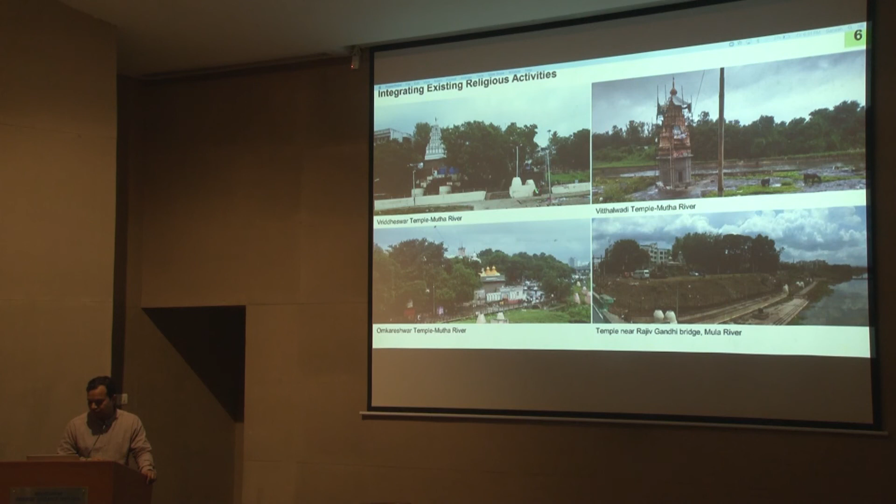A number of existing significant temples are there, and how we can improve the connectivity of these temples with the river, because river has very important role in the religious context with the temple activities also. So that we try to understand. There are a number of gardens along the river. So we map those and how we can seamlessly integrate that garden with the riverfront.

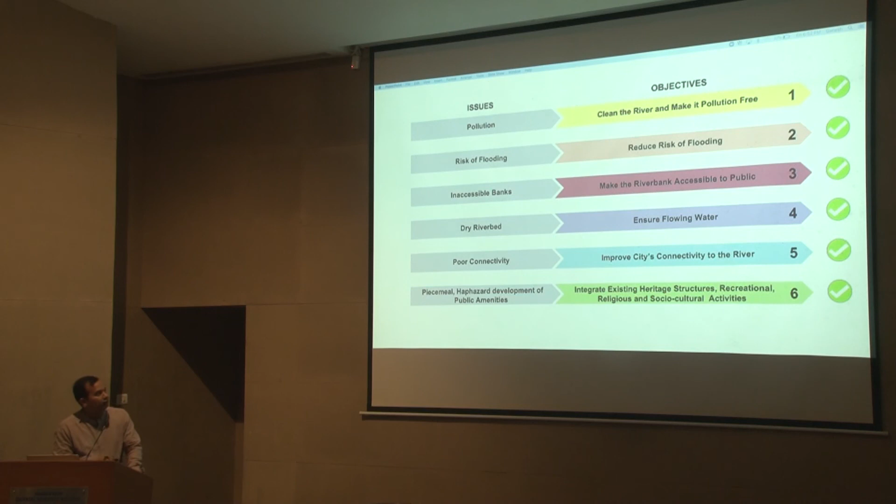So that way we can sort of achieve all these objectives, or sort of resolve all the issues which are in a current situation. All that is resulting into this kind of master plan. In an area specific manner, I am just explaining you. So with respect to the land record boundary, which we prepared that map, with respect to that, this is the area, 687 hectare of the area of the river on paper.

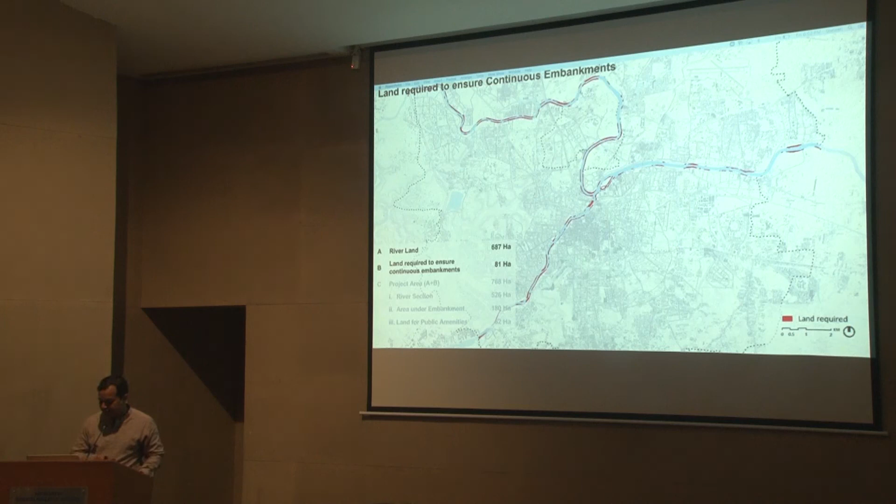But in order to allow the river water to flow with respect to the 100-year flood and to house the green embankment, we need more land going beyond these areas. So 81 hectares of land will be required to prepare this project, which is 768 hectares. So the total project area includes 81 hectares of acquisition, and 768 hectares becomes the project area.

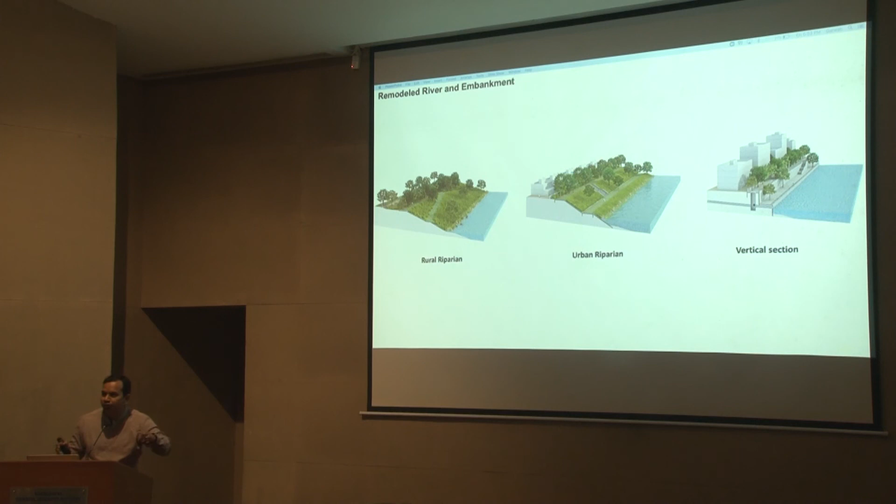Within that, during the lean period, this becomes the river width. So 526 is the river where we will always have water available. I'm repeating, this is the lean period river. But during the flood, these embankments will also have water up to this top level. Just a 1 meter buffer, which is as per IS, we need to provide some buffer from the HFL. So embankments will be 1 meter above. So up to the 100-year flood, these embankments will be able to carry the floods.

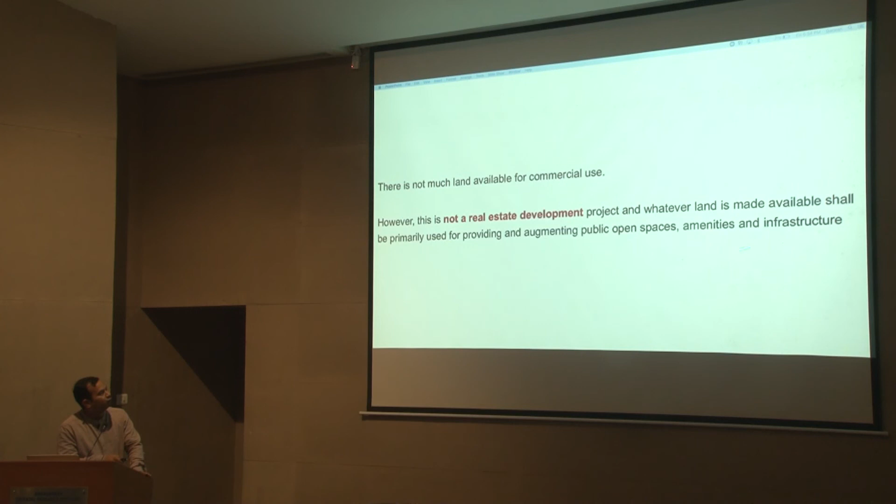So these embankments will require 180 hectares. So almost 92% of the project area goes back to the river only. The remaining 8% of area which you see here, the sliver land parcels, that also we are turning back to the city. So definitely we are not proposing any kind of real estate in this project, but there will be augmentation of public open spaces, amenities and infrastructure. So which kind of amenities and infrastructure?

So in return, apart from the edge protection work, apart from the cleaning aspect, everything, this is what the remaining 62 hectares of area will accommodate. It will have parks and gardens, temples, the ghats, recreational activities, plazas, boating facilities, eateries, all these things.

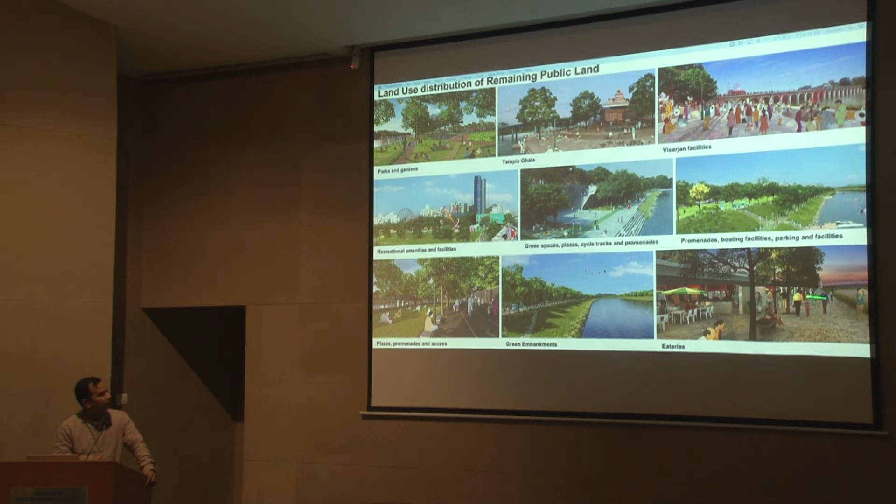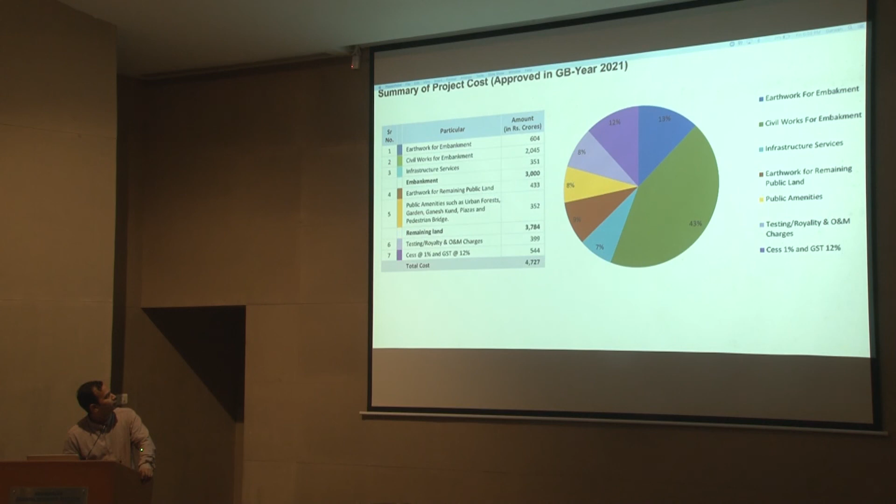So this master plan was prepared and approved by the Standing Committee and General Body of the PMC in 2018. This is the revised cost of the project in 2021. Here we have also added all the taxes and O&M for 5 years, which was not there earlier. So that's all further detailing. Currently we are working on stretch number 9 and stretch number 10 for the detailing. At the close, I'll quickly run through some frequently asked questions.

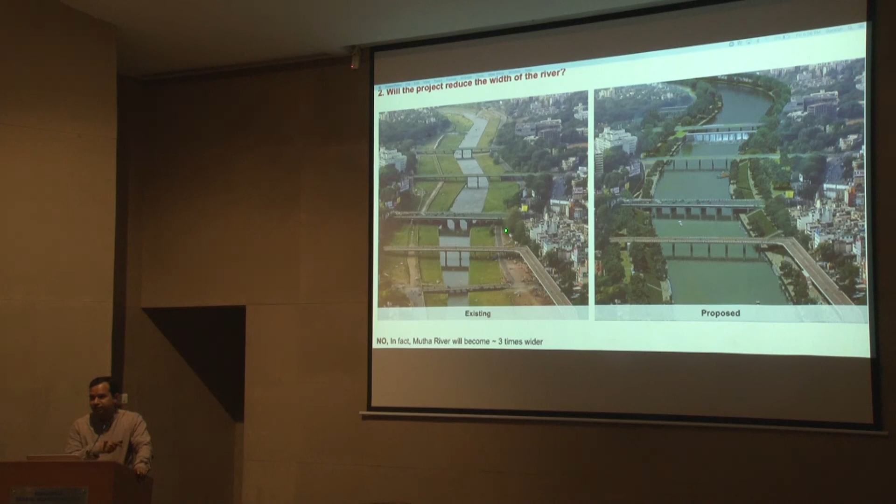People always say that this project is about the concreting of the embankment. Is it like that? No, it's creating 87% of the embankment which is green, and 13% where acquisition is not possible, only there we have to forcefully do concrete embankments. Will the project reduce the width of the river? No. At many places we are widening the current width as much as possible. This is one example from the Mutha River. The entire Mutha River has this kind of channel, which is 30-35 meters, and which will be widened to 90-95 meters.

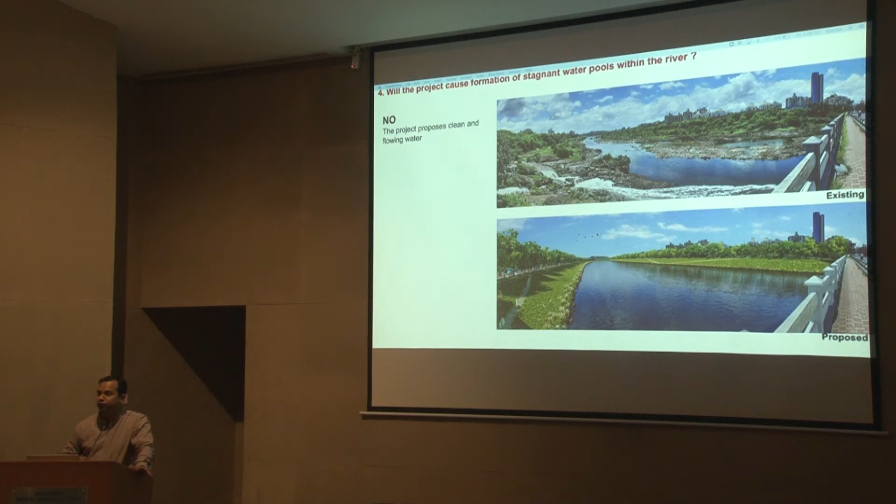Will the project make Pune's rivers into a straight channel? Sometimes you might hear this, but no, we are not making these rivers straight. The meanders, the curves of the river will be maintained, just smoothened so that the carrying capacity of the river improves, but the curve alignment will be maintained. Will the project cause formation of stagnant water pools within the river? No, definitely not. I explained the strategy and how a significant, huge amount of clean water will be poured, so it will not be stagnant, rather it will be clean flowing water.

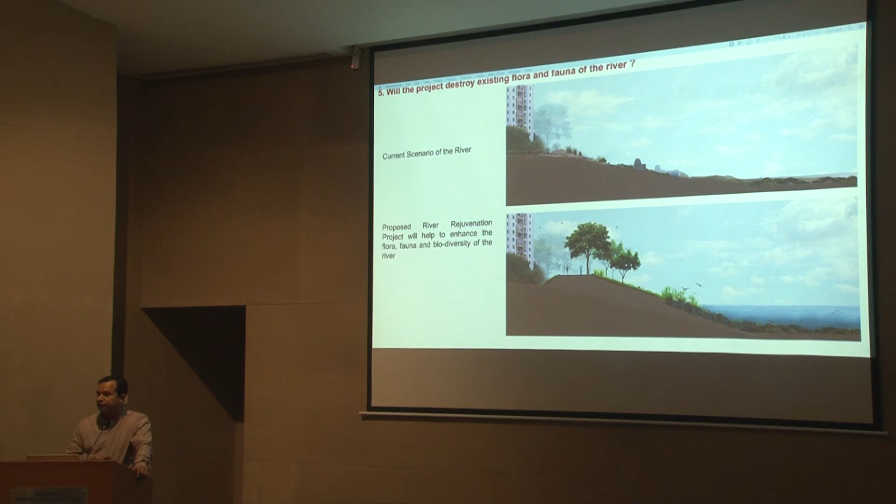Will the project destroy existing flora and fauna? This is mostly the condition. There is no existing significant flora, fauna or biodiversity. Here we will have this kind of edge protection work which will bring good quality flora and fauna, and where existing flora and fauna is there, definitely we'll have sensitive measures for that. Will the project only beautify the river? Definitely no, because it's a comprehensive project: cleaning, flood protection, accessibility, water availability. So it's not only the beautification of the river.

Will the river land be used for commercial redevelopment? No, it will not. It will be given for public amenities only, like parks and gardens. No real estate building kind of project is there.

So here I stop. There is a huge team behind me. I am just one person taking the opportunity to face you and present the project, but a huge team and experts, some of my team members are already here. They helped us build this project, and even prepare this presentation. Thank you very much.